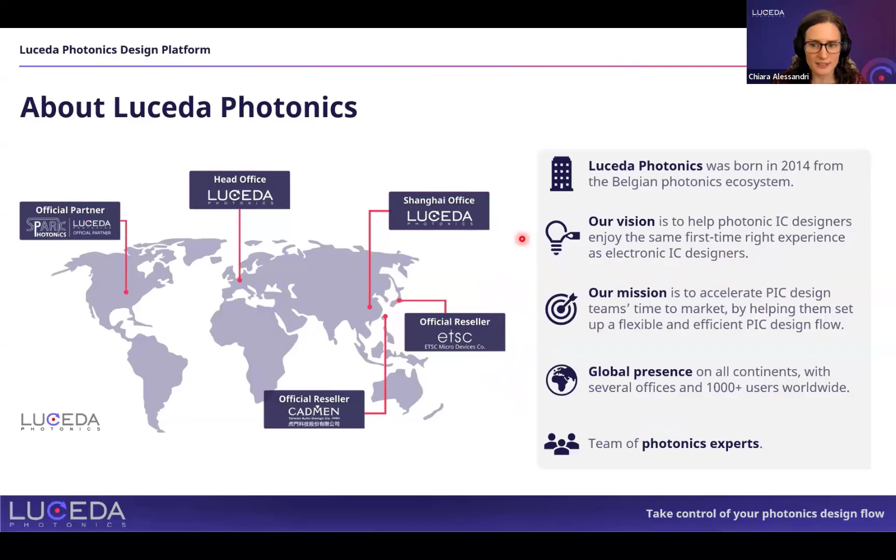So for those of you who don't know us, Luceda is a company based in Belgium. We are now 10 years old, born out of the Belgian photonics ecosystem. We are really a photonic design company. So we are a team of photonics experts, and our customers are designers, and we sell software to design photonic integrated circuits. But we are also an ecosystem company. So we pride ourselves in having many ecosystem partners, among which we can find foundry partners, assembly testing, general ecosystem partners, and of course, software partners, among which Optiwave, with which we just started a new partnership.

And what we aim to do as Luceda is to provide a first-time right experience to photonic IC design. And we do that with our products, which are built in Python. So we are based on a code-driven flow, and we bring together all the aspects of PIC design in this one flow so that people can build chips that fit into products and products that work.

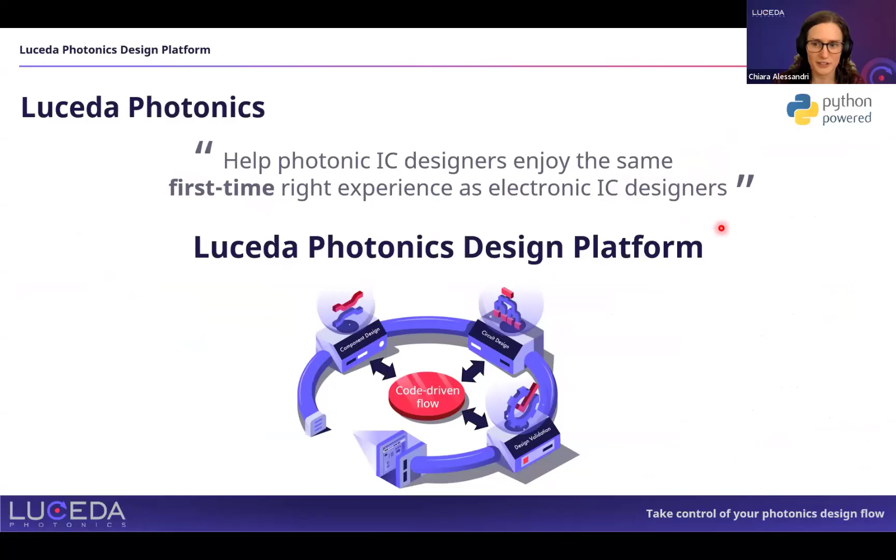This is an overview of our platform. Our core product is Luceda IPKISS. This is the platform that centralizes all the design aspects. So you have component and circuit layout, simulation, and ultimately what you do, including validation and verification, it all leads to GDS export, and a GDS export that is correct according to foundry rules.

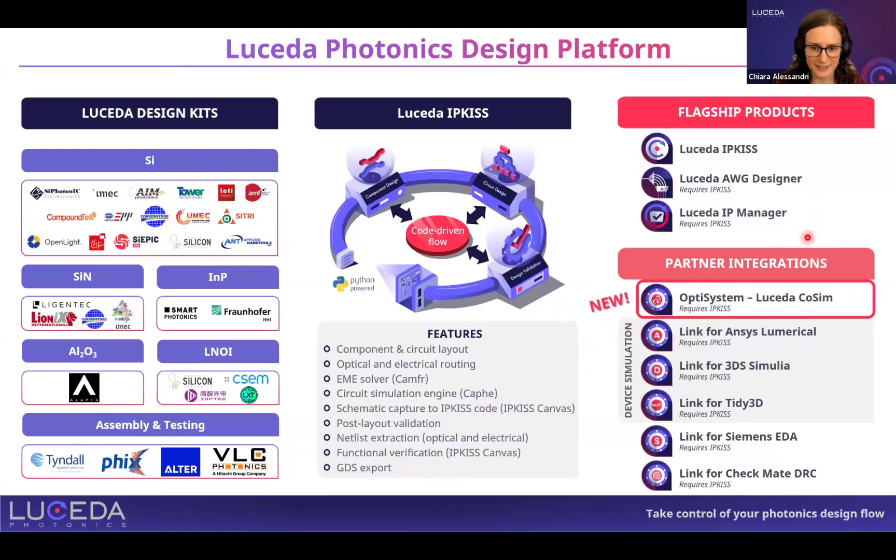We also have specialized tools that build on top of our core product, and we also have partner integrations such as the OptiSystem Luceda CoSim that Ahmad has introduced. This new integration enables designers to fully simulate photonic integrated circuit-based products in a unified system. So you can leverage Luceda's layout and modeling capabilities of the PIC together with the system-level simulation features of Optiwave.

Here you can see a schematic example of what's inside an optical transceiver design. So you would typically have a chip which contains the integrated photonics part, which you can design and simulate with our software. And then you can place it in a system-level environment where you can combine these with, say, the electronic drivers, DSP from Optiwave.

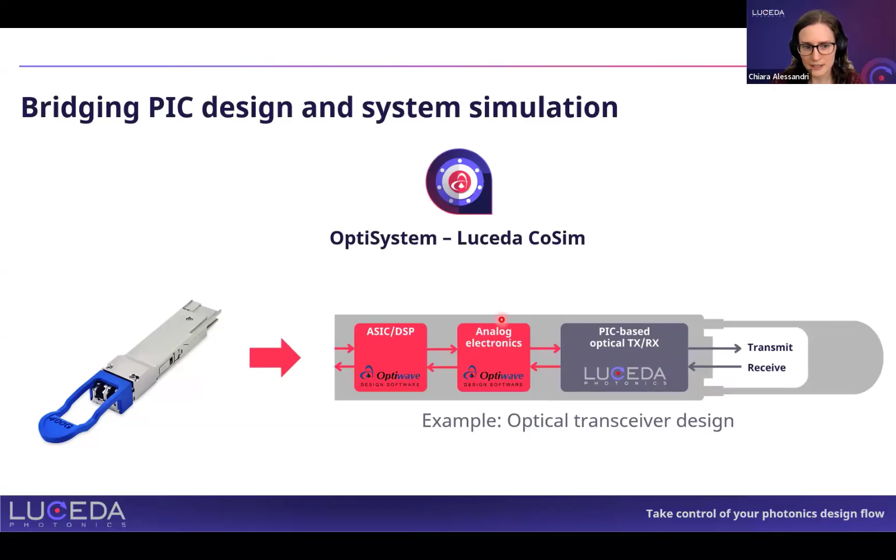So this is a screenshot of the tool. Ahmad is going to show this more in detail later. But basically, you have this OptiLUCEDA CoSim component where you can easily embed circuits that you have designed with Luceda. And it can work together with other components that Ahmad showed in his slides already to then run system-level simulations.

So the question here is, how do you design the PIC, which is what you would use Luceda for? In Luceda, one flow is able to take into account the layout of the components, circuit, and simulation in one flow. You can do this parametrically, and you can do this according to the constraints imposed by the system and the foundry and the components that you're using.

So in many cases, you will start from a schematic capture to ideate on your circuit, think about the high-level parameters you want to use for your circuit or system, and think about the high-level specifications. You can do this in IPKISS Canvas, which is a schematic capture tool, which is part of Luceda IPKISS.

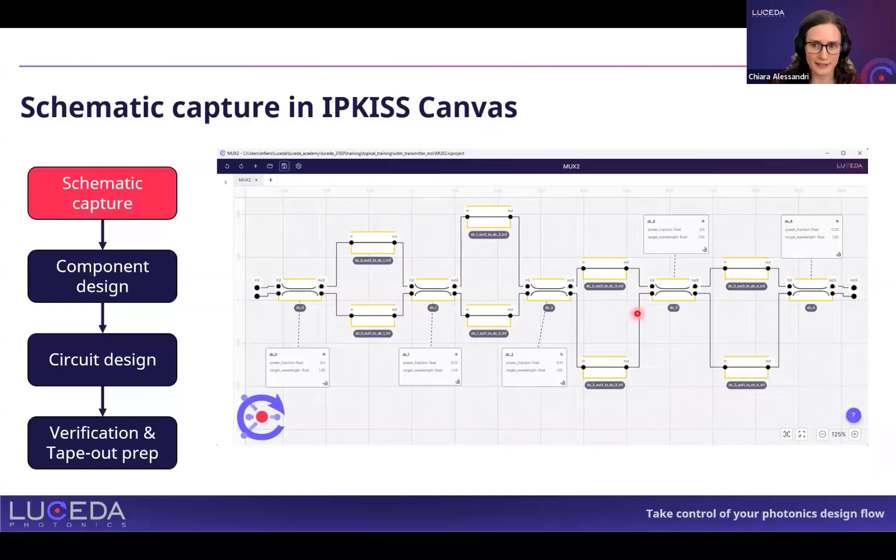In a second instance, you will start by implementing the components and the circuit you need to design this circuit in layout. So the first step is component design, which you need unless you're using standard building blocks from foundry PDKs. You can leverage the standard Python language that we use in Luceda IPKISS. You design components that are parametric in layout and simulation.

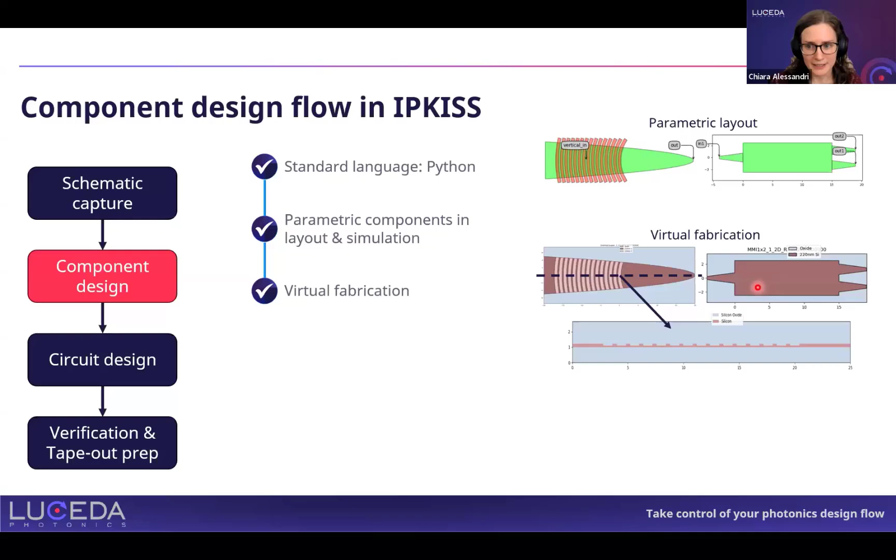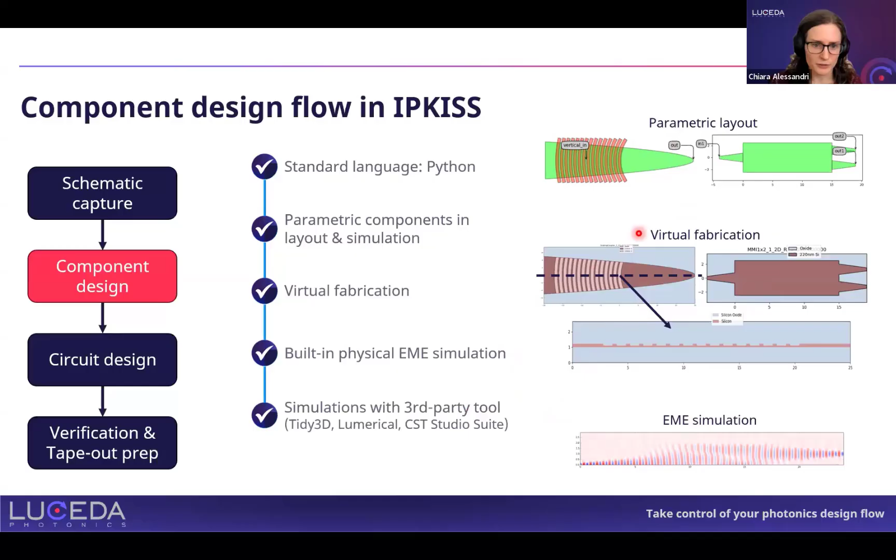You can virtually fabricate them according to the layer stack of the foundry or the PDK that you're using, and run EME simulations or simulations with third-party tools to which you can automatically export the layout you have created in IPKISS. So imagine you have, for example, a directional coupler, and we simulate it in FDTD.

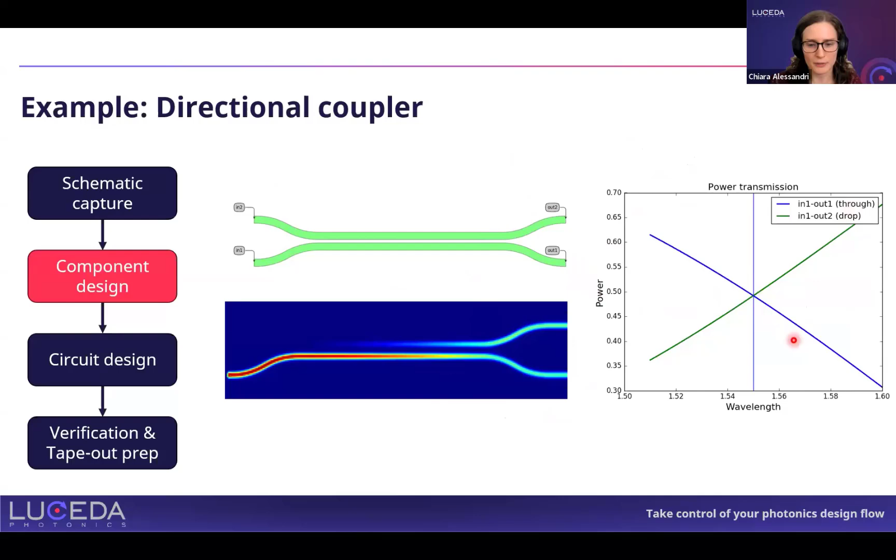Then you can extract the S parameters, import them in IPKISS, and build a model for your components so that you are able to run, let's say, S matrix simulations, circuit simulations at any point in time without having to rerun FDTD every time.

Now imagine you do this for a wide range of parameters. So in the case of the directional coupler, you could sweep the straight length of your directional coupler. So you have a parametric cell, you fix with the parametric layout, you fix that one parameter many times, and every time you run simulations. At the end, you can do a fitting of the simulation data with a specific fitting heuristic that is suitable for this component, and you obtain a parametric analytical model.

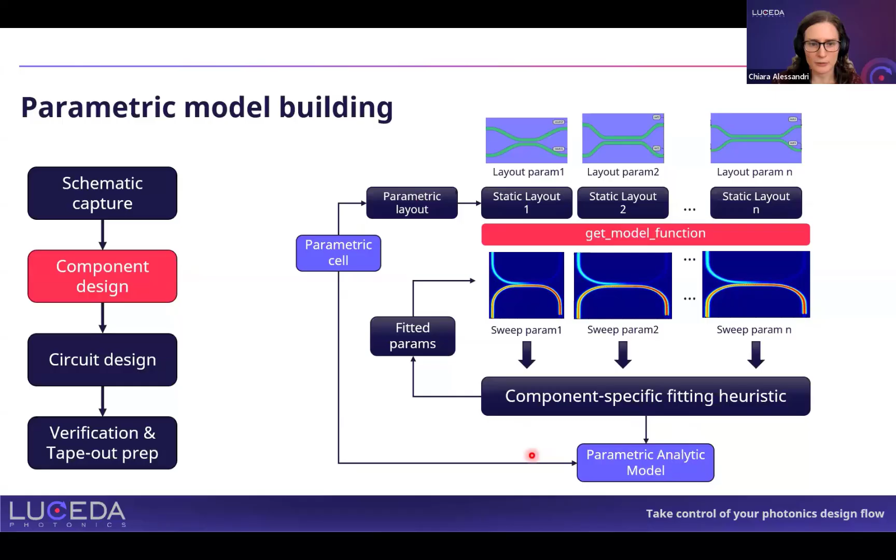What this means is that in your parametric cell, you can now change this length to the value that you want, and you have a parametric analytical model that will tell you how the component behaves for that specific parameter. And then you can use these smart components in circuits.

So here we're implementing the schematic we saw earlier, which is a wavelength demultiplexer. If you have two wavelengths in input, you can split them in the two outputs. And here, basically, what you can implement in an IPKISS cell that synthesizes this layout is a synthesis algorithm that basically takes the behavior you want your system to have and relates that to the design that you need to achieve that specific behavior.

So what does it actually mean? In the case of the multiplexer, you want to control the FSR, you want to control the center wavelength. So these will be the parameters of your cell, and in the back you have Python code, IPKISS code that does all the calculations of the physics to implement the right layout with the right length difference between two arms of an MZI, with the right straight length of the directional coupler to obtain this kind of transmission spectrum.

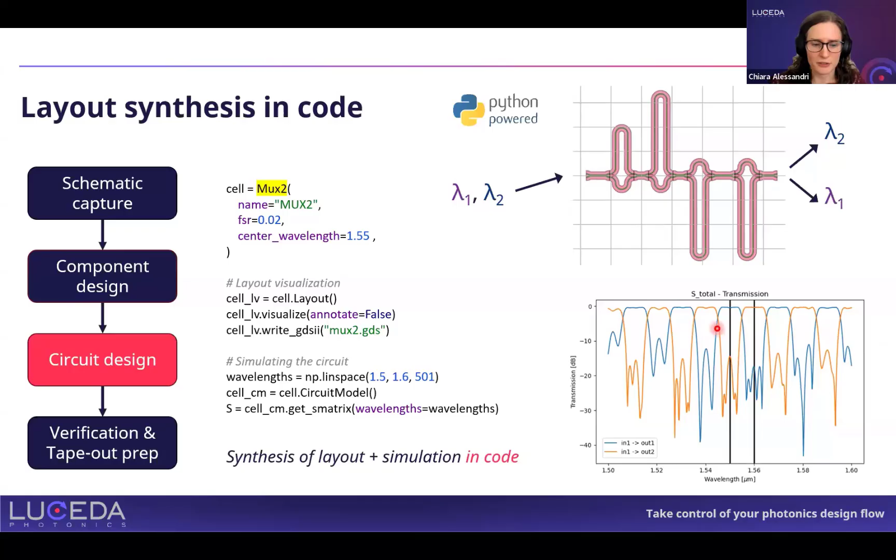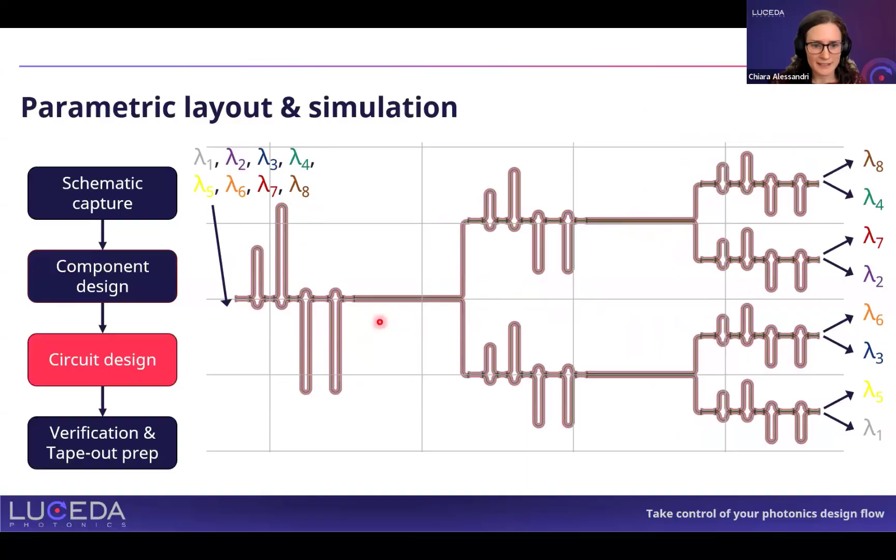And in the next step, you can then build more complex circuits. So here we are cascading MZIs, basically the same multiplexer you saw earlier can be used as a cell that is then cascaded in a sort of tree. So if you have 8 input wavelengths in this circuit, they will be split among the 8 outputs.

And this will be a type of, let's say, output simulation that you achieve by simulating such a circuit in IPKISS, where you keep a tight link between the layout and the simulation. So if the layout changes, you will see that in your simulation as well.

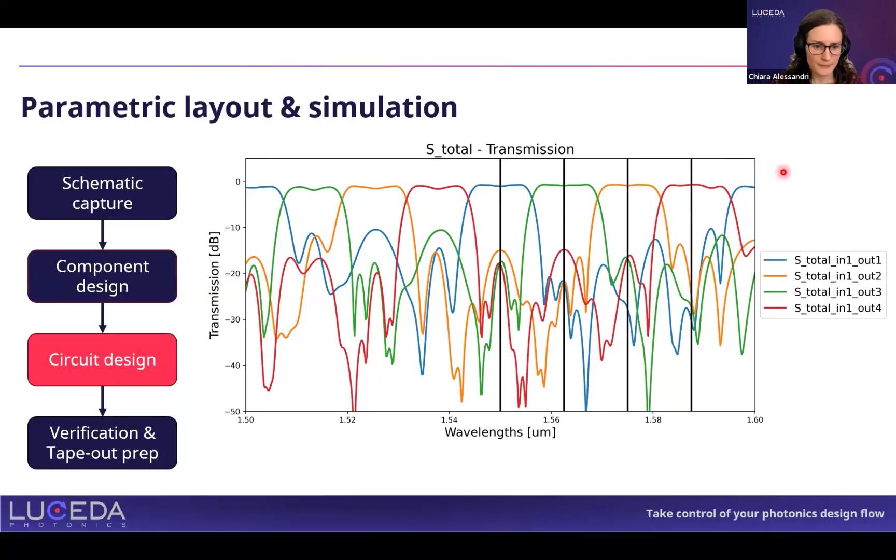And all this circuit design is backed up by foundry PDKs, so you can design custom building blocks and use them together with foundry building blocks. And very importantly, you also combine that with requirements from assembly and testing in what we call assembly design kits or test design kits.

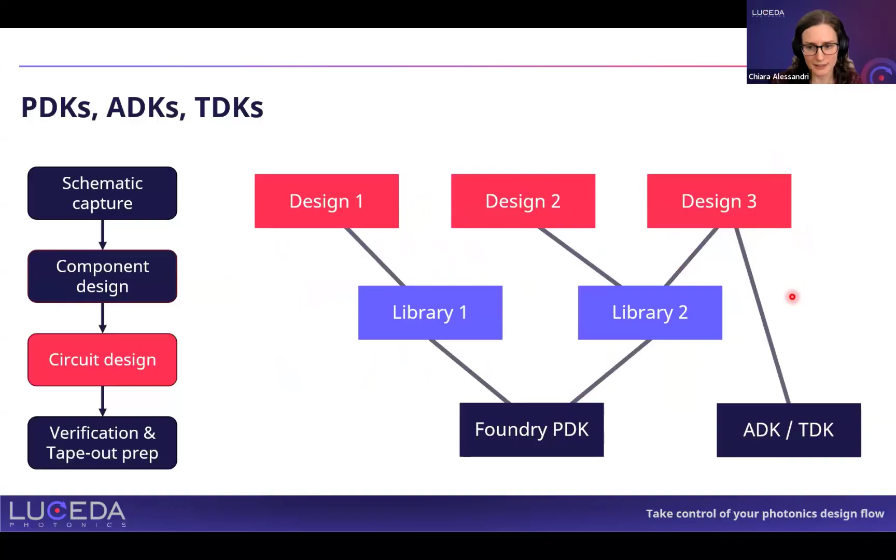And of course, the same flow that I showed you so far for the multiplexer, you can use it also for active components tailored for the application that you need to design for. For instance, here you see an IQ modulator designed with the software for datacom applications, or an optical phased array for LiDAR applications. And you see these circuits being part of a packaging frame provided by PHIX, which is automatically including your design through code.

So you can follow this parametric framework where you can interchange and combine components you design with building blocks from PDKs. And then the behavior of these circuits is simulated according to the models built at component level. And then you send signals in, read signals out, and see how the circuit as a whole behaves as a combination of all these subcomponents.

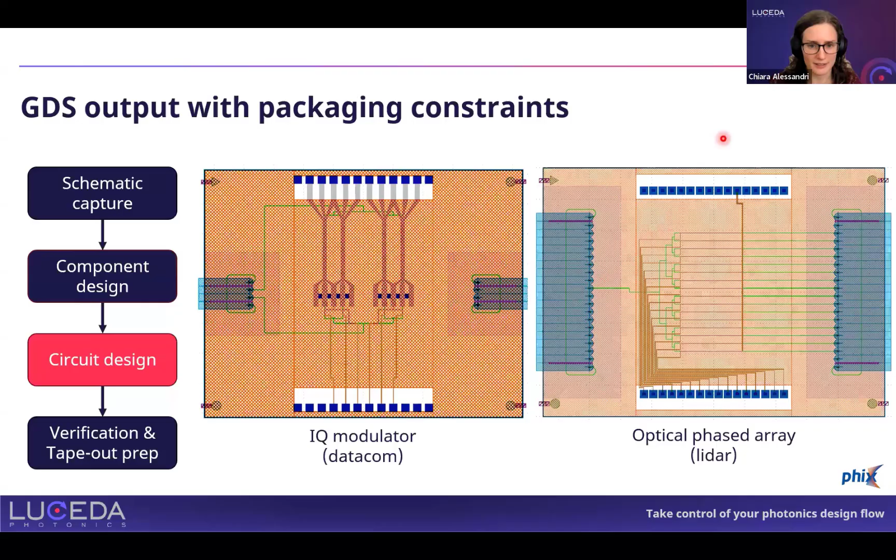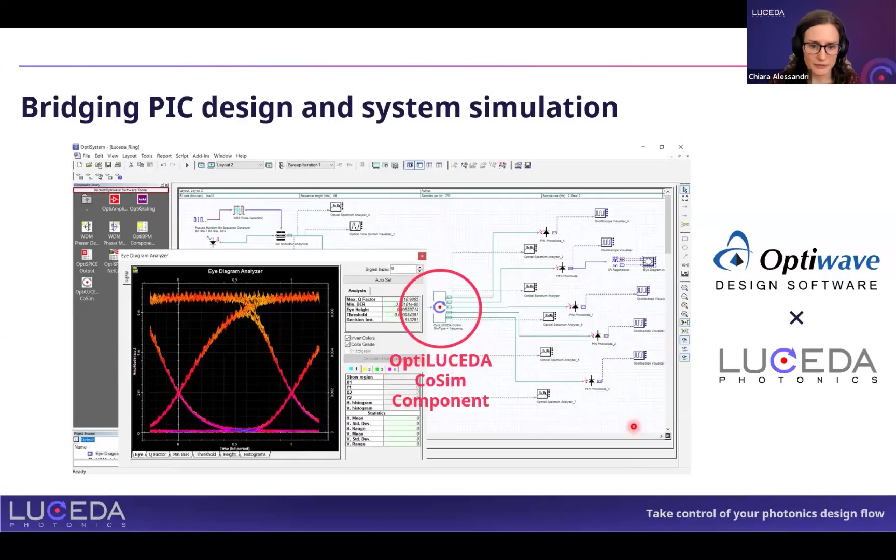And it is really where the integration comes in, because you can load these circuits inside OptiSystem and then manage your system simulation inside OptiSystem by defining all your inputs and all your outputs, how you want to read your signal, what kind of information you want to get out of your system. You define the figures of merit that you want. And again, you can combine the Luceda component with all the other components from OptiSystem.

As a final step, we have verification and tape-out preparation. In the end, what you're going to send to a foundry for fabrication is the GDS file of your layout that you have simulated and validated, but it also has to be correct in layout.

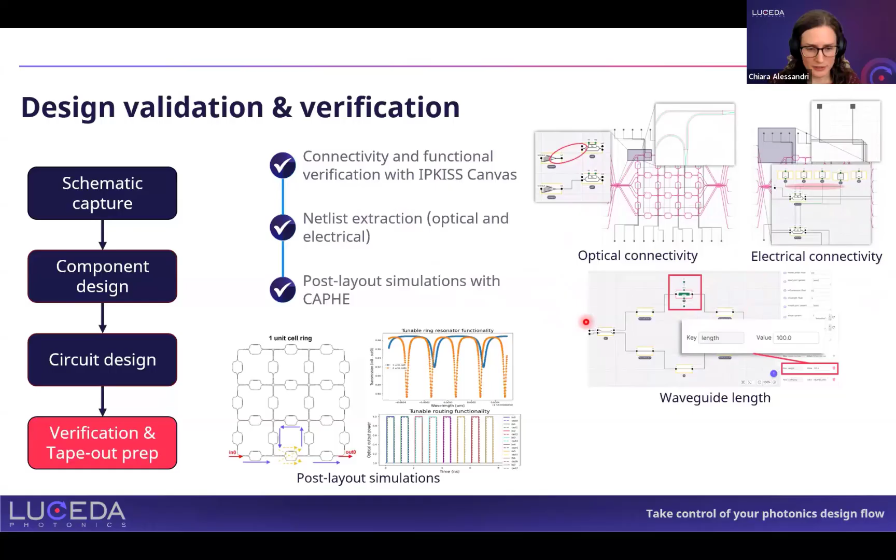So you want to check that the optical connectivity doesn't have mistakes and is implemented correctly, that you don't have electrical shorts, that the waveguide lengths are implemented as intended. You can extract the netlist automatically to verify it, and run post-layout simulations, also in OptiSystem, of course.

Many of our customers also use 3D export to verify the circuit or to just import the 3D model of a circuit in whichever tool they need to import it into, whether it's a simulator or a 3D visualization tool.

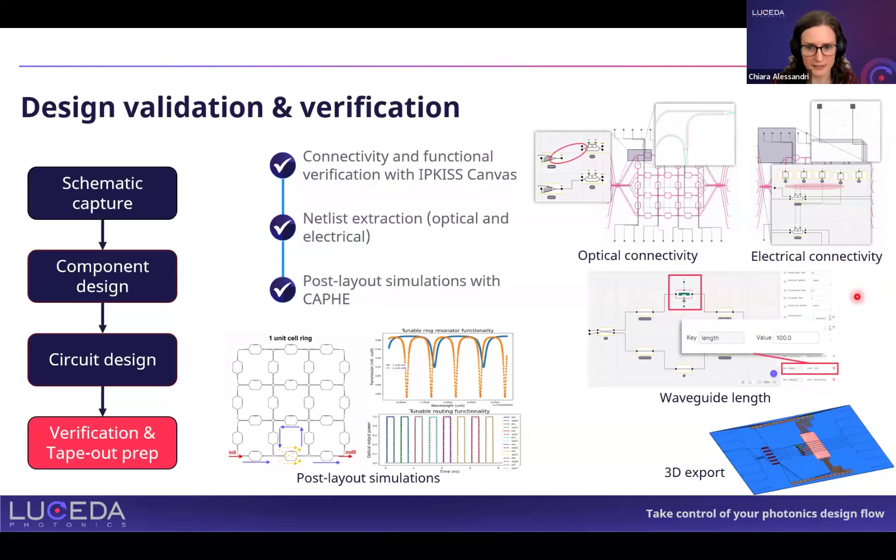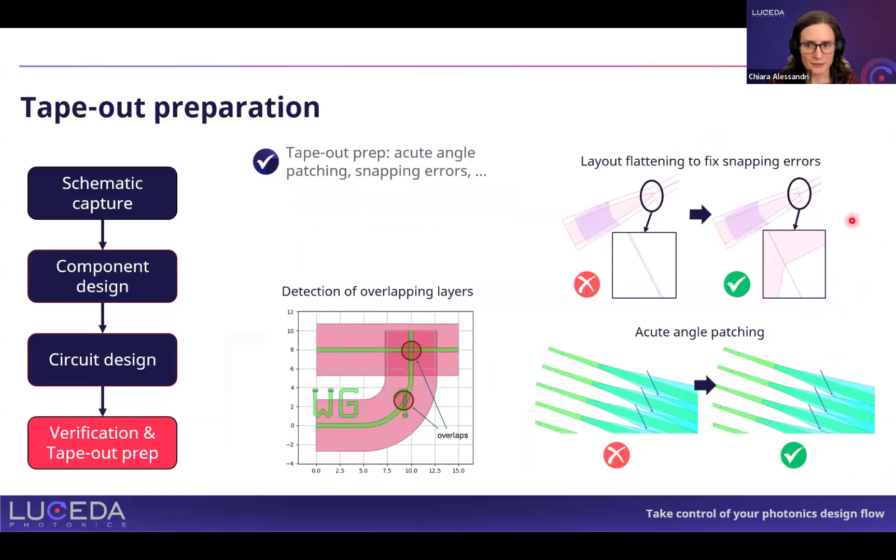And also very importantly, you have to prepare your designs for tape-out. So making sure that your design is accepted by the foundry, that you get rid of small, let's say, design issues that would not be accepted by the foundry. They would be raised by DRC. And when we're talking about DRC, we're talking about design rule checking.

So something that you can also do with Luceda is to create your layout using IPKISS and then run DRC using a single line of code. In this case, that's implemented with the link for Check Mate DRC, which is the recent tool developed by Spark Photonics. It allows you to run DRC checks on your layouts and then open them in KLayout.

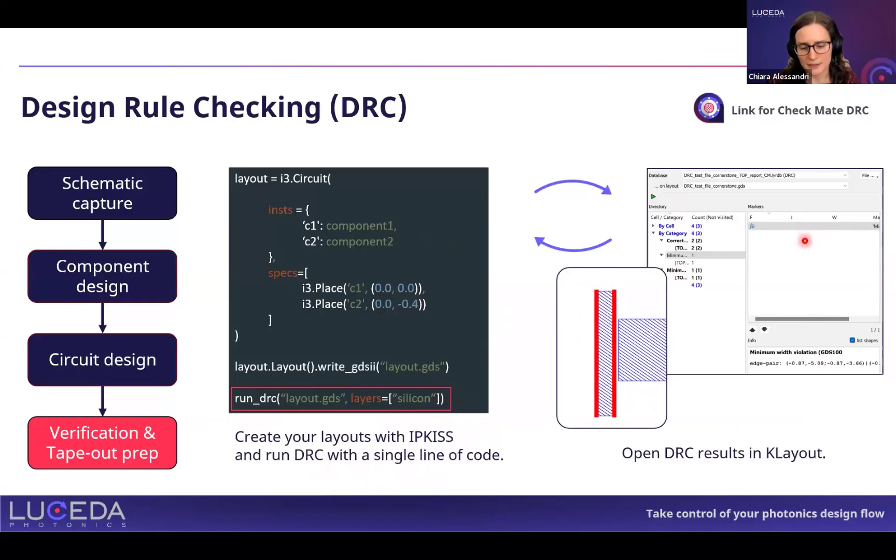So circling back to conclude to the integration with Optiwave, the key benefits are that you can combine the layout and modeling capabilities of Luceda, what I gave you an introduction to, together with Optiwave system simulation. And this doesn't require any manual translation, as Ahmad will show you in a bit.

So you can embed photonic integrated circuits made with IPKISS inside OptiSystem without having to manually redefine ports or manually extract the netlist. And this gives you a complete electro-optical system digital twin. This can be done for many applications. I showed you before a schematic of an optical transceiver, but it's just an example. Actually, we are very interested to see what you do with this.

You could use this for quantum key distribution, LiDAR sensing, think about designing AWGs, arrayed waveguide gratings, in Luceda, and then simulate them in OptiSystem. So there are no real limitations on applications, and we are curious to see what you're going to do with this.

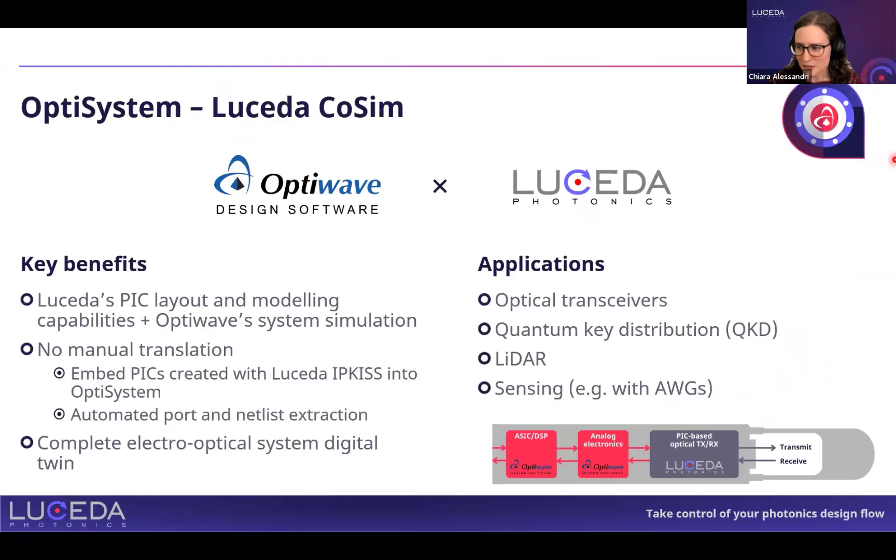And I guess I'm going to stop sharing my screen now and get back to Ahmad. Perfect. Thanks, Chiara. I think that's very good and very interesting for this kind of integration to allow users to characterize photonic integrated circuits designed by Luceda in OptiSystem.

So what I'm going to do here is show an example quickly about a ring resonator, which is designed by IPKISS and then used for demultiplexing DWDM channels, and it's characterized in a layout in OptiSystem. I'm going to show you the example in a minute in real life, but it's in the component here, which is the OptiLUCEDA co-simulation component.

We did first the characterization of the frequency response of the components. So what you can do, you can send an impulse here into the component and then characterize the output at every port of the component. And in the second part of the example, as you can see here, you can take a look at the response of the channels at the output port.

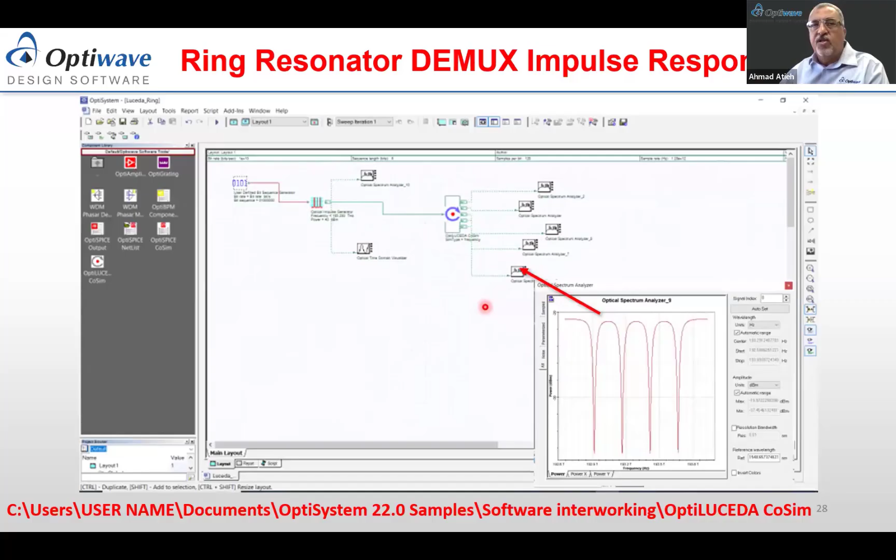And the other part of the example is we modulate different DWDM channels, as you can see, 4 of them here, multiplex them, and then transmit them through the PIC ring resonator demultiplexer, and then basically demultiplex each channel. And you can look at the output of any channel here and characterize the bit error rate, the Q factor, and how the device performs.

Now, you can do different sweeps of parameters in the PIC design, and then every time you can take a look at the output results. Because OptiSystem allows you to sweep the parameters, you can do the sweeping and then look at the results. So let me go into the example here, on another virtual machine I have.

And in this example, you can see we have this component called user-defined bit sequence generator. We send eight bits here, and one of them is 1 and the others are 0. And then you send it into these impulses. Now, in the main layout, you can set up the bit rate, you can set up the sequence length.

Here we have 8. You can have the number of samples per bit, and then sample rate. This is for other applications and so on.

But once you set it up, you go to the Luceda component, which is a very simple kind of structure. You can select the domain, whether it's frequency domain or time domain for the calculation. You can either specify the path for IPKISS locations, or you can automatically detect that.

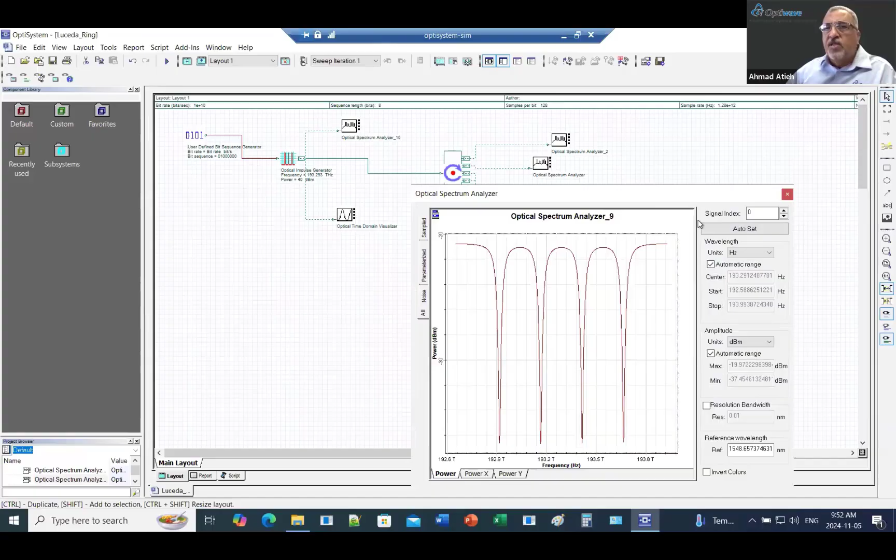Once you do that, you can run the calculation. I did the calculation ahead of time, and you can take a look at the results at every port of this demultiplexer. This is the drop channel, as you can see here, the pass-through, and this is each drop channel.

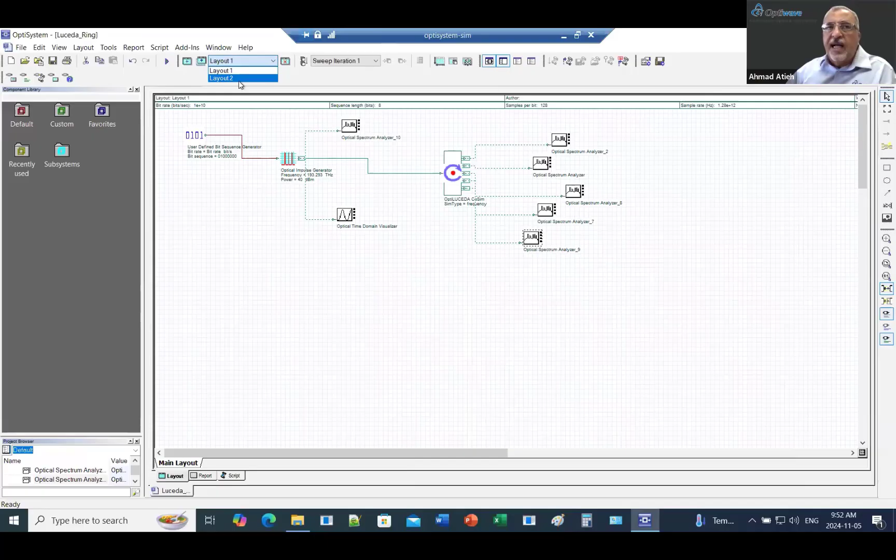Now, the other layout - because OptiSystem allows you to have as many layouts as you want, you can duplicate the layout as is, or create your own empty layout. In this layout here, this is the example where we use the system characterization of the PIC demultiplexer.

We load again the PIC file, same scenario, and then create the ports. You have input ports and 5 output ports, and you can set up a random bit sequence and lasers, the type of modulation you require to analyze this device with. You can get benefits from using the example library, which allows you to build on these systems.

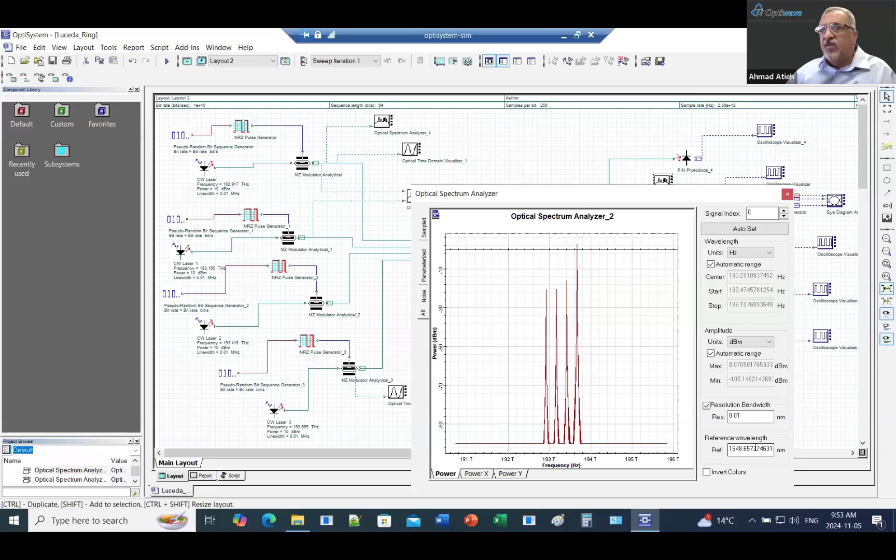And then here at the device, as you can see, we have placed the spectrum analyzer, the optical spectrum analyzer. This is the new feature added about the calculation of the resolution bandwidth at a specific wavelength.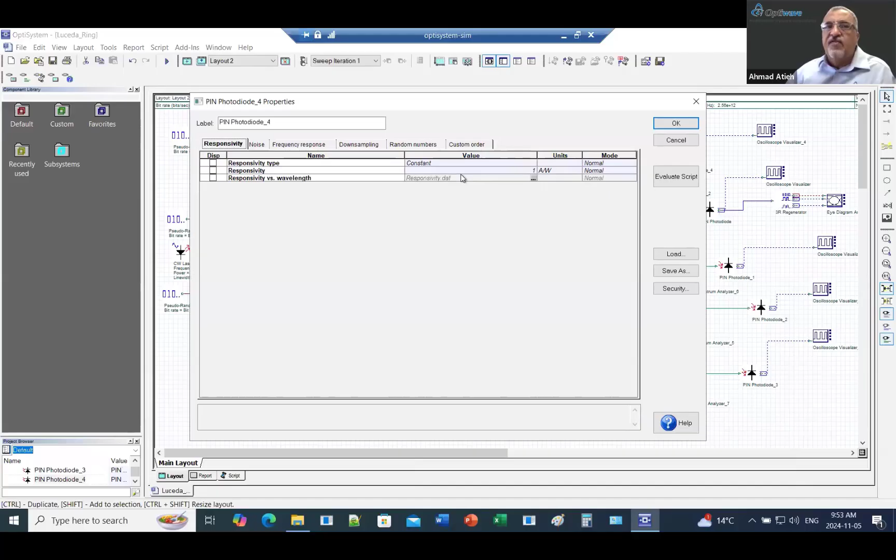And you can also have the pin detector. Depending on the application, you can have PIN, APD, or SPD and so on. And you can have a 3R regenerator, or build your own system by connecting the reference pulses and so on. There are different options to have.

And then this is the eye diagram where you can analyze the Q factor, the bit error rate, and so on. Any of these components, by the way, if you right click on the component, you can have component results - the available results in the component.

You can have, as I showed you before, the component view, which lets you look at some results here. If there are some plots, it will appear here. You can have 2D plots, 3D plots, reports. We have lots of webinars which explain more details about the software.

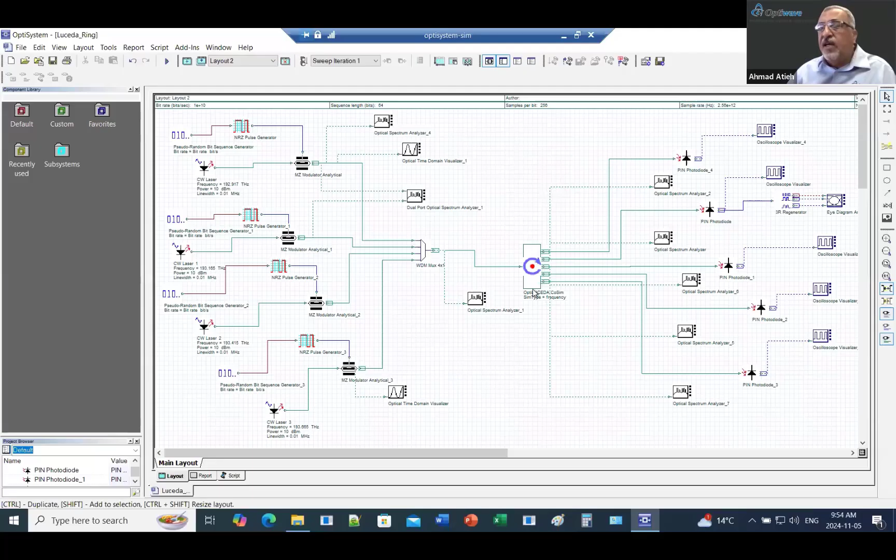But as you can see here, with the integration of this PIC device component, you can analyze, you can do sweeping, you can do a lot of parameters to simulate ahead of building the device and investigate the device thoroughly. We will have another webinar actually on...

Let me just get out here. We're going to have a more detailed webinar with Luceda, talking about the process thoroughly, in maybe a month or two months' timeframe.

Okay, so this is kind of the results. Now, just to summarize here, we have this collaboration with Luceda to characterize photonic integrated circuits within a system.